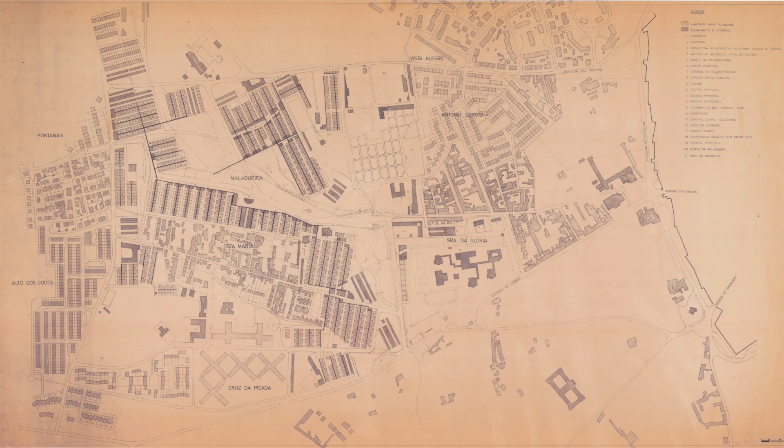I was investigating one part of the Malagueira, trying to see a very well-known Siza project from a new perspective, by its so-called conduit or aqueduct. And that was my starting point, because sometimes Siza calls it conduit, sometimes he calls it an aqueduct. And from that I understood it's still an ambiguous element in the project and also in the architect's mind.

So I'll start. In his sketchbooks, Álvaro Siza describes the Portuguese city of Évora as the white city with granite. This poetic connection is immediately recognizable when contrasting the city's dense white urban fabric with the granite monuments of its historic center. The analogy is referenced in this piece of new town that constitutes Malagueira housing estate, a project dating from 1977, where white row houses overlap with a strange concrete body that crosses the neighborhood streets. First designated as conduit, this element is later elevated to aqueduct.

Malagueira projects the work of Álvaro Siza beyond borders. International critics rediscover the architect of the Casa de Chá da Boa Nova in what some deem to be the last great social housing project. It is analyzed mainly through an urban and typological lens. The conduit is scarcely mentioned, sometimes omitted, or even criticized. Rafael Moneo doesn't understand it, concluding that the project could exist without this element, which he describes as monumental, evident, and rhetorical. That was my starting point.

From Rafael Moneo's argument, I wanted to reanalyze this project and look for the conduit's fundamental role in the whole project. And from the reanalysis, I've tried to go through the steps of Siza and the project. Évora stands on a high hill in the Alentejo plains as a well-preserved heritage city of granite convents, churches and palaces. Enclosed by surrounding historical walls, several ancestral routes radiate into the territory.

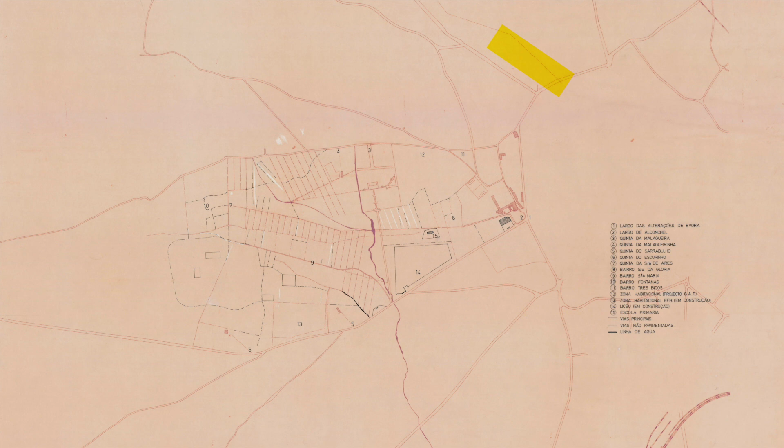And it's this first drawing I wanted to show. It's basically a first technical drawing of Malagueira. I don't know if you can see it. So this drawing identifies basically what he saw in his first trip. This is the Évora historical center. There are radiating several ancestral routes. The aqueduct of Água de Prata, which is still very notable here. And the two roads, the road to Lisbon and the second municipal road.

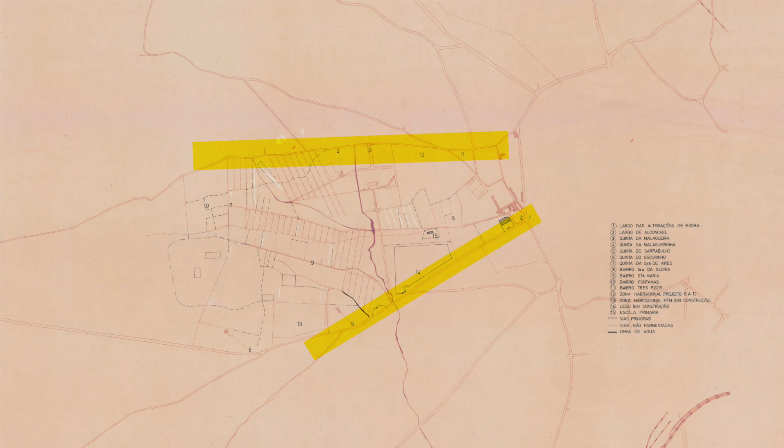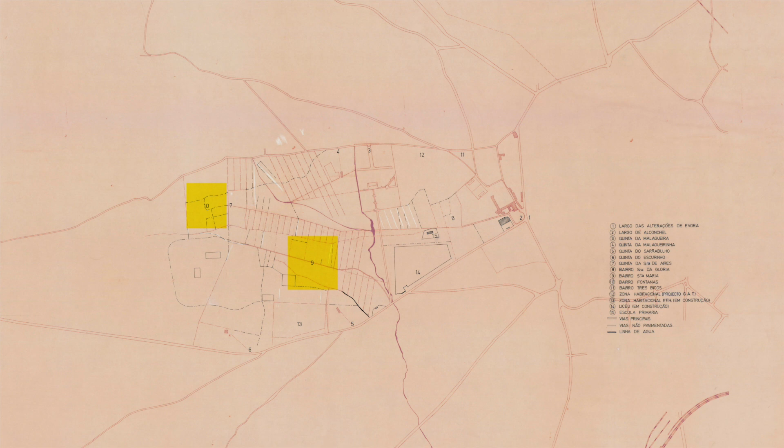The space in between, and very important, the two water lines, this one and this one, that will basically shape Malagueira's main drawing. And then he identifies the several illegal settlements that were present, like Bairro Santa Maria, Bairro Fontanas, and the former agricultural fields like Quinta da Malagueira, which gives the name. Malagueirinha is a smaller form of this one, and several others, including the already being built high-density Cruz da Picada, which is the crisscross you see in the photographs. That will form a solution to Malagueira housing estate.

That was... What's the illegal settlement?

Sorry, what's the illegal settlements? There were masonry houses, but they were not considered legal by the government, and that's part of also after the SAAL program, that's more well known. But this was supposed to be a SAAL operation, but it changed.

It was put on hold, and it's only in '77 that Siza is called to do the project, when they refute this kind of high-density project. And from that, in his first sketches, he's thinking about what's the main thing to do in this project, if it's to build the houses or to preserve the water lines. And that's why the water lines will shape the whole project.

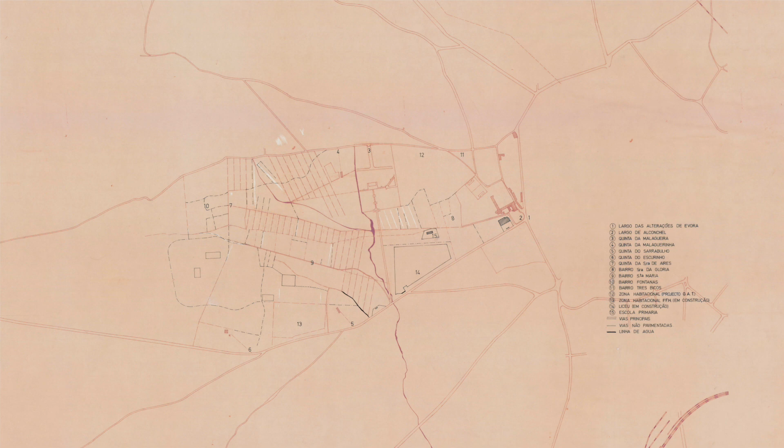You can see here, he will do the theoretical approach that Ribeiro Telles had on building green corridors around the water lines. And this was an important reference because the landscape architect who worked here, João Gomes da Silva, was called because he was a student of Ribeiro Telles. He was trying to get Ribeiro Telles, but I don't know why he couldn't. So he took his student and they worked, but later on in the 80s.

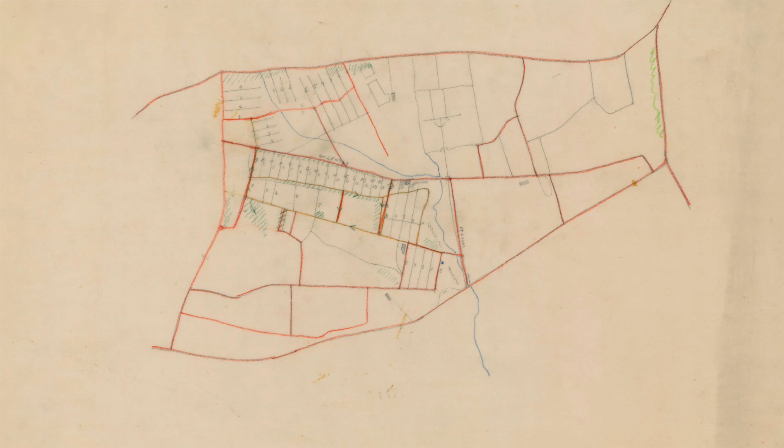Although the conduit first appeared in the urban plan, its definition will be developed in the long time of the project. Álvaro Siza seeks intensely, throughout his sketchbooks, multiple hypotheses and variations of what form the conduit should take. The pages are covered with sketches, poems, texts, or notes on imagined cities and architectural ideas and possibilities, which we may not find built in Malagueira, but in later projects.

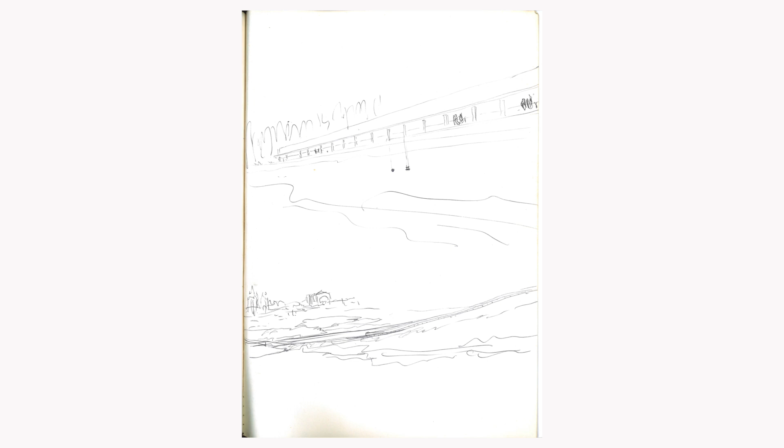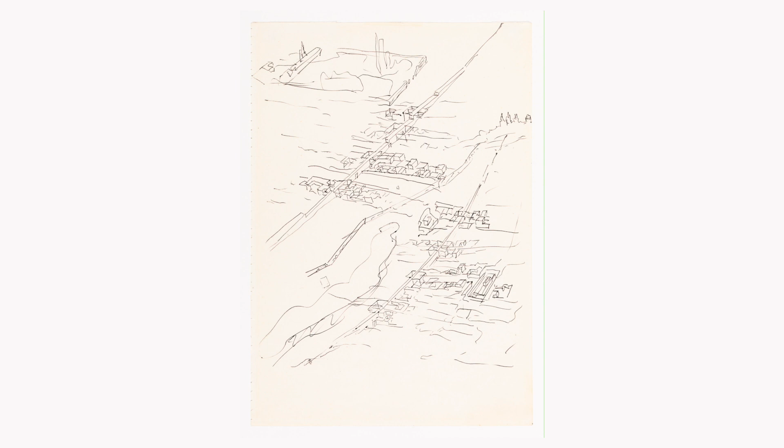So one of the first drawings is this one, and he has the idea of creating this urban ordering axis to define an elevated wall to provide water and light and to serve as a pedestrian path. A few pages later, the line evolves to a collective and electric transport in what I call a futuristic vision of an aerial train connecting to the historical city.

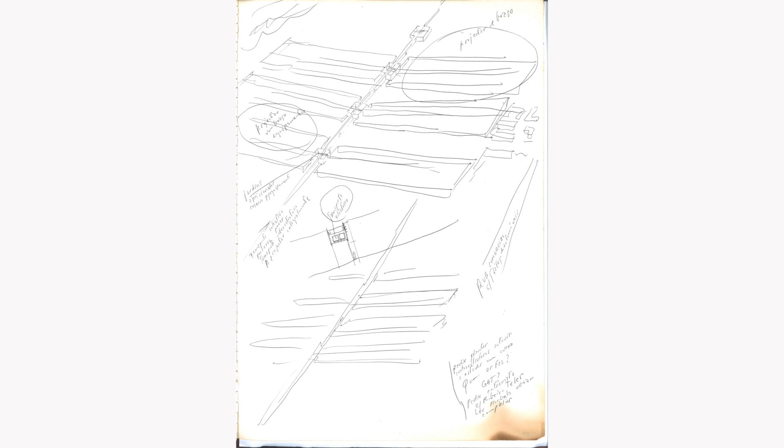The idea of path progresses to a covered passage, and at a particular moment, an elevated street is added in reference to Alison and Peter Smithson's Streets in the Air concept. These are pages from the sketchbooks. They are copies, so you can...

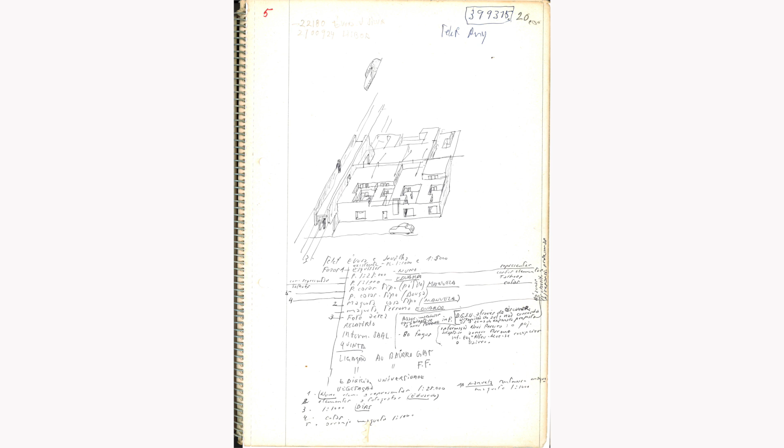But does he say that? Or did he go to see the reference explicitly? No. Oh, right. That's what I was going to ask. But we went to interview him in February, and I took this book, Urban Structuring by the Smithsons, and he was really interested. Always denying the reference, but he was really interested.

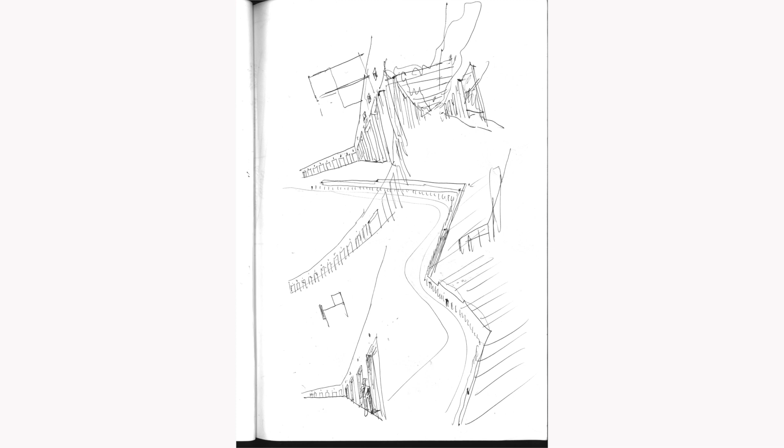The conduit is continuously idealized as a connecting axis and a pedestrian link to the city. It features the possibility of a canopy, a recurrent element in Siza's architecture, probably a reference to a Greek agora that reminds of Niemeyer's Marquise of Ibirapuera. Another hypothesis has the possibility of becoming a continuous building over a covered passage that recalls Aldo Rossi's Gallaratese project, or Évora's 16th century aqueduct.

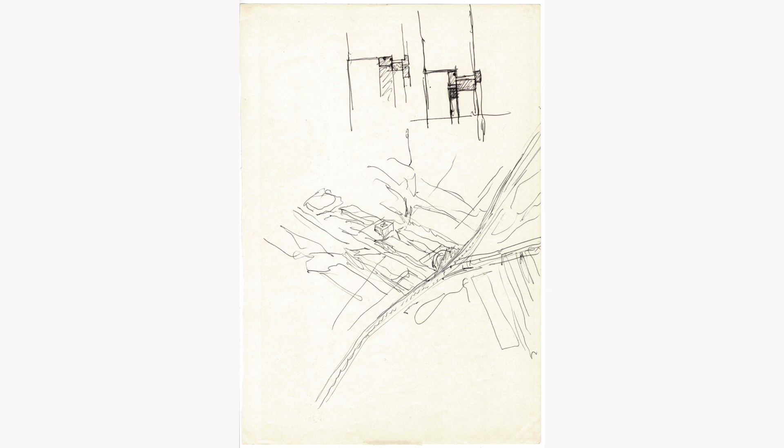Besides the general idea, special parts are simultaneously developed. The intersection of the two main ducts, in this drawing, will be marked by a particular moment to sign its centrality, an elevated facade that resembles a church facade, a clock tower, or a Hollywood billboard. This Venturian facade opens up a square at its back with an elevated semi-dome.

This element will develop to become a reference piece, a pure form monument in a square like a Roman forum, a space for people to meet and express their collectiveness, visible on Évora's horizon with the cathedral towers and the grain silos. This is the semi-dome that's still unbuilt, and I think he still wants to build it.

Introducing another scale, along the project development, a problem emerges. The house repetition, though adapted to topography, could form monotony and thus bring lack of urban character to the neighborhood. A variation element was necessary to offer singularity of public spaces, besides uniting the scattered dwelling clusters.

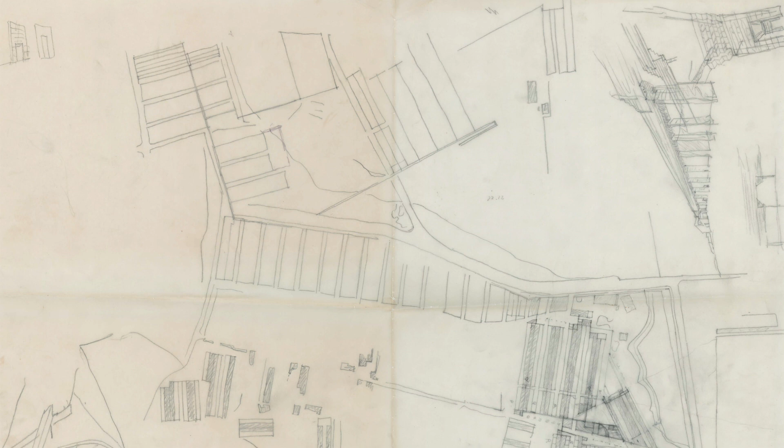This elevated structure of the conduit would provide dialogue between the homogeneous and continuous urban fabric of individual houses and collective buildings, to define what he calls another scale. The proposal would mean a negotiation and commitment between several utility suppliers. The solution would be worked by Siza and his engineer to reduce costs to the essential minimum.

It consists of a structure of reinforced cement block porticos in a regular metric with L or U-shaped reinforcements and prefabricated slabs. Its materiality reclaims the analogy of the White City with granite, now in a more brutalist and arte povera version in the use of concrete blocks.

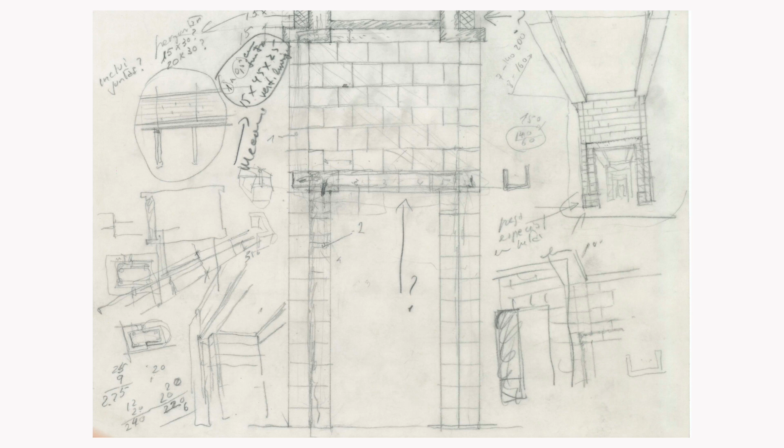Infrastructure is designed with the same care and rigor as an architecture building. Looking into the technical drawings, we find surprising the detail and precision of the cement block's stereotomy and the dignity given to such a common construction material. The conduit thus becomes an architectural element, the aqueduct, that defines Malagueira's public space and this other scale.

Siza draws every urban situation generated by the encounter with housing blocks to introduce singularity and complexity to these public spaces. Additionally, in the aqueduct street crossing, he builds small openings in pure geometrical shapes: a circle, a semicircle, a triangle, a square, a diamond, as urban signage.

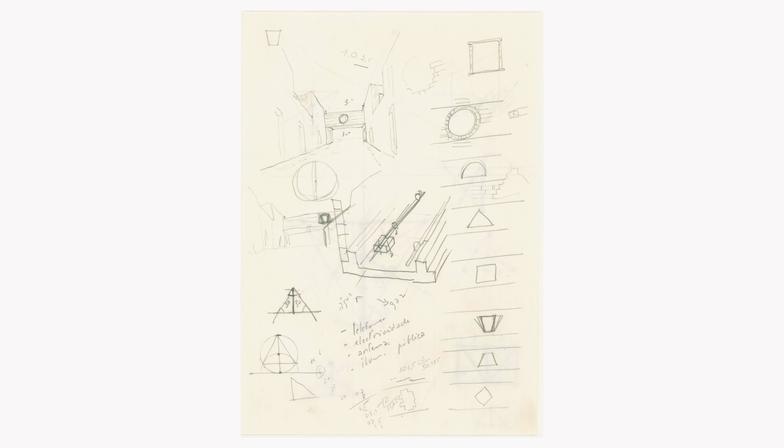This is the main drawing, actually, a big one, where you can see most of the conduit or the aqueduct, with the square where the semi-dome should exist or will exist, depending on you. And you see the urban structuring of every plot of houses. This is the 8 by 12 plot of each row house. And there's always a second aqueduct element that supplies the several row houses.

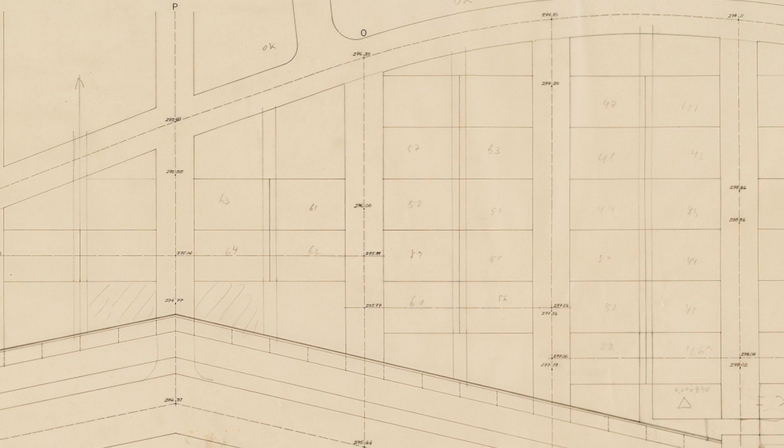To be precise, the aqueduct supplies what? Water? Water, electricity, communications, gas, and that's it. The plumbing and all of the sewers are in the streets, yes.

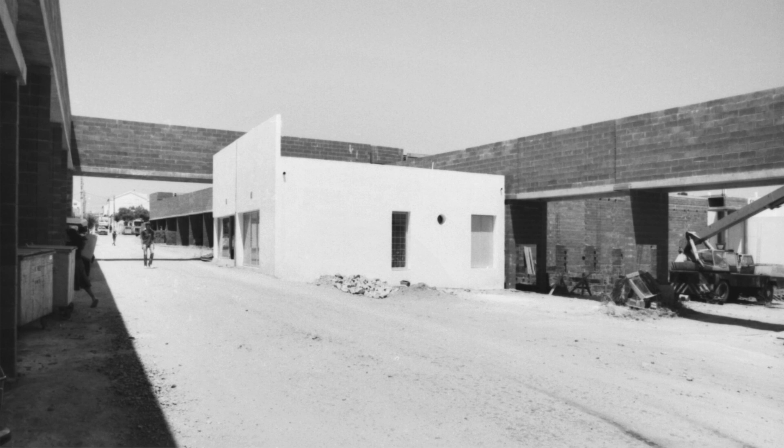So, imagining Malagueira without its aqueduct, as Moneo suggests, would remove the most interesting and crucial piece to understand the project. It is fundamental to understand and read the urban complex, to give cohesion to its various clusters, to the inclusion of a collective sense and the introduction of urban life vitality. The aqueduct materializes Alison and Peter Smithson's pattern for their streets in the air concept of urban structuring, like an infrastructure in the air concept that defines urban morphology.

The Passetto in Rome or the Vasarian corridor in Florence could be considered predecessors of Malagueira's aqueduct. Although historical references in architecture are more common after Robert Venturi's Complexity and Contradiction, Siza's references come from the surrounding context and 20th century architecture. He seeks to create an urban place with all the complexity, vitality, and ambiguity of the city.

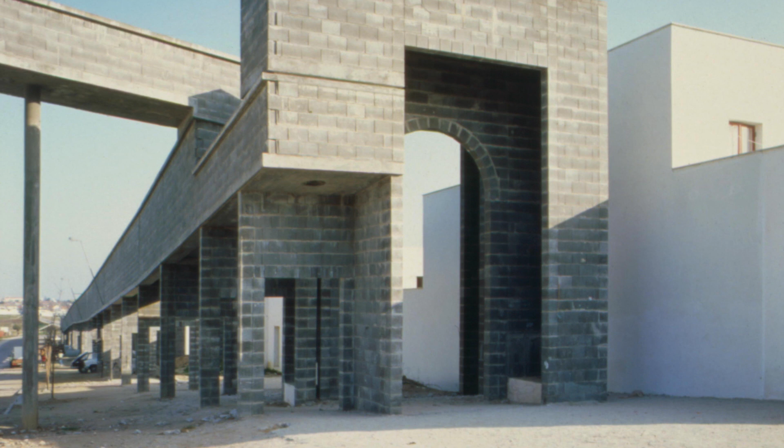The aqueduct is the most ambiguous element in Malagueira. Some accept it, some adore it, others reject it completely, but it's impossible to remain indifferent to it. In a new neighborhood, identity poses an important question, mostly in terms of social cohesion. The aqueduct supplies water, light, and communications, and within and without a collective image of belonging to the city. But its lack of program for inhabitants is possibly one of the reasons for its incomprehension.

Above all, it constitutes a contemporary monument, recalling Lefebvre's statement that the monument offers each member of society the image of their belonging and social face. However, in Malagueira, this monument is not yet consensual. It needs time to show its durability and resilience to achieve timeless beauty. The contrast between the dark, authorial concrete elements and the bright, anonymous white houses may be considered a contradiction.

The Malagueira aqueduct is a work of continuous contradictions, like the change of materiality order in the semi-dome central square, or the absence of a continuous linearity from source to a deposit or a fountain. But the most disturbing contradiction is the lack of physical connection of the aqueduct to the historical city.

In a recent interview, Siza states, "We are all postmodern. This does not mean that we use pediments, Doric columns, or the color lilac in our buildings." In what can be defined as a characteristic attitude of postmodernism, he uses reference as a design method without using literal analogy of classical history, and uses a conceptual element, the aqueduct, as an invented pre-existence as a design theme. The conduit is elevated to an aqueduct, the invented monument that wishes to produce a city.